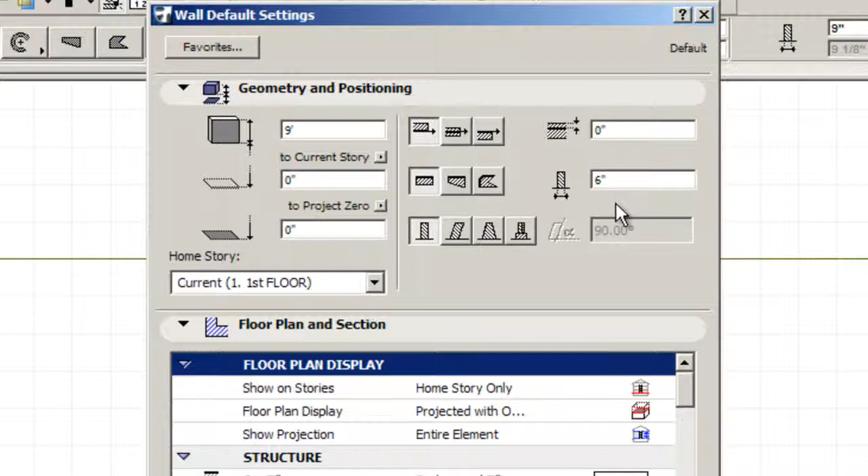For exterior walls, there's really not a lot more that needs to be changed. If you wish, you can change the colors. Like right now, this one's set at this beige color for one side, but on the other side it's set as white. You can lock all the colors together by clicking the chain, and it'll be the same all the way through. This can always be changed at a later time once you've got your walls drawn.

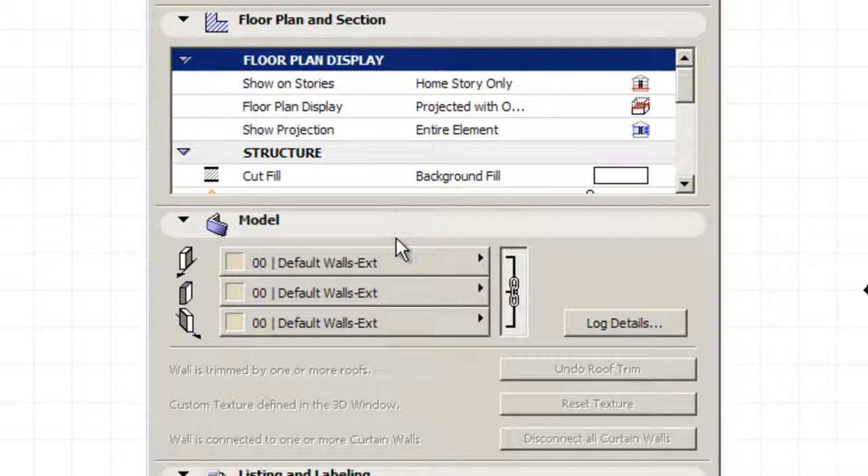Once you have this set, if you want to use these again, the easy way to set this up is to use favorites. So if you come up here to favorites and click on that, there's a number of basic favorites that are already configured from ArchiCAD. The problem is none of these settings work for us because they all have either the wrong widths or heights for the walls.

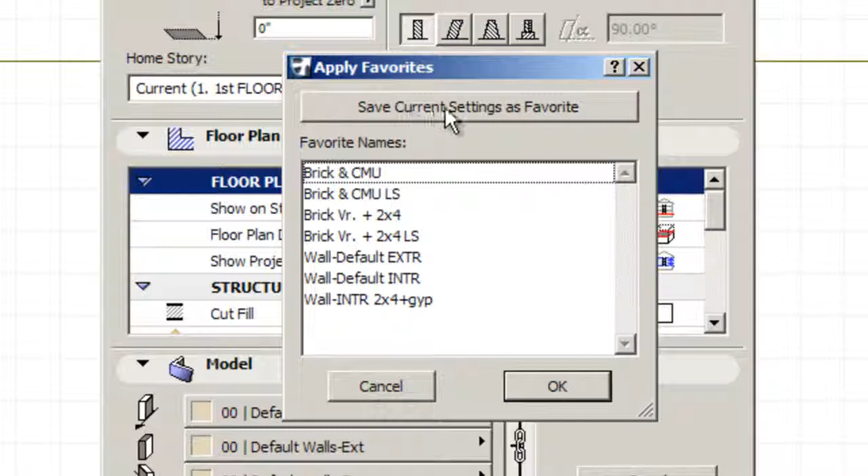Since we already have our settings set, you can use this Save Current Settings as favorite. Click this button and give it a name. I always give it something really simple, like Exterior 2x6 wall. And click OK.

Now it's really important to make sure you have all your settings done correctly before you do this Save Current Settings, because once it's in there, it's in there. You cannot edit it. So if you wanted to make a change, you'd have to create a new favorite. Okay, so once we've done that, we say OK.

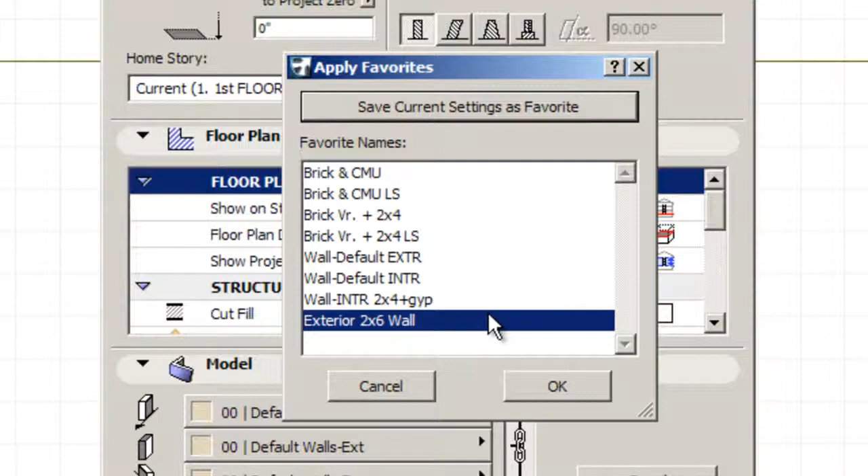Now we can go ahead and start drawing. To do the drawing, you just click OK, and then you come out and start drawing your walls wherever you want to be. I'm just going to go real quickly and show you. Okay, so there's a set of walls.

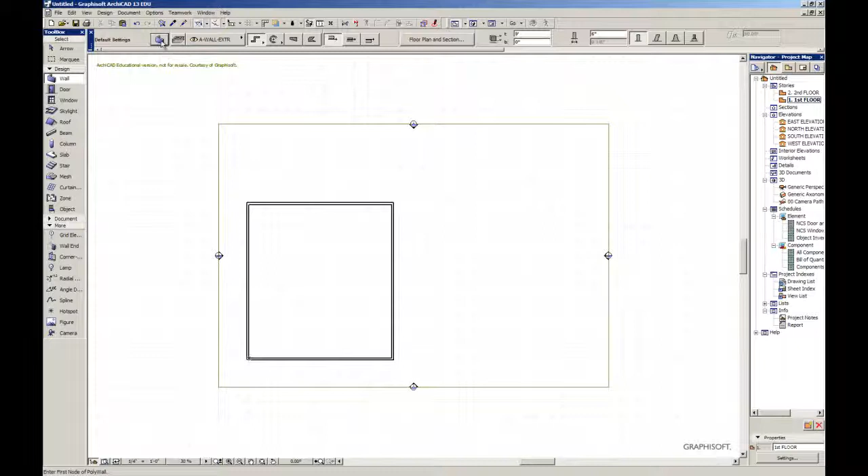Now let's go back in and say we want to do the interior walls. Go back into the settings, and for the interior wall, we want the walls to be 8 feet tall, and we want them to be 4.5 inches wide. The 4.5 is 3.5 inch 2x4 plus a 1/2 inch of drywall on either side.

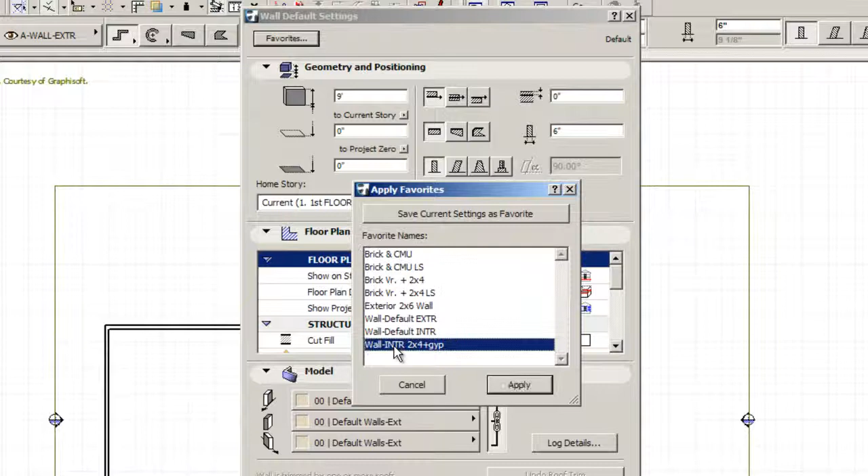So to do that, the easy way is to come in here to favorites and actually use this Wall Interior 2x4 plus Gyp, and apply that, and you'll see that it changes a bunch of settings. This wall setting is actually pretty close. You can come up here to the 9 feet, change that to 8, and it'll automatically assume the feet. It's already at 4.5 inches.

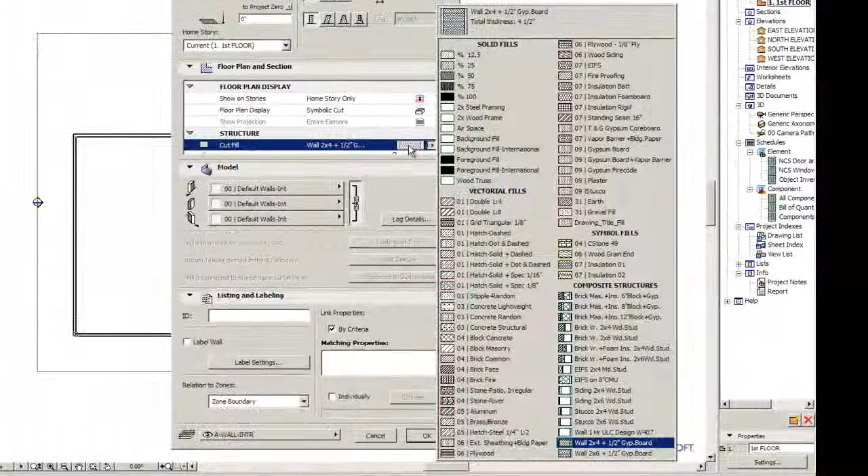The only other change I would make is right here in this cut fill. It defaults to show a wall section that has insulation, and we don't really want to see that, so what I'll want you to do is go up here and change it to airspace, and it'll just be blank. Most interior walls are hollow anyway, so we wouldn't put insulation to begin with. Colors are already locked together at white. You can change those if you want, but it's better to just leave it alone.

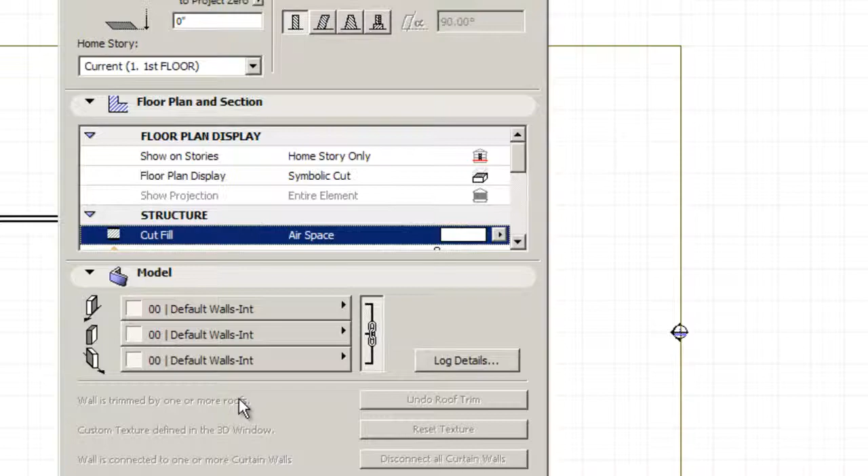Again, we'll go up to favorites. We'll say Save Current Settings as favorite, and give it a name that's easy to remember. Again, make sure you have all the settings done before you do that. Once you've got those, you can go in and start to draw again.